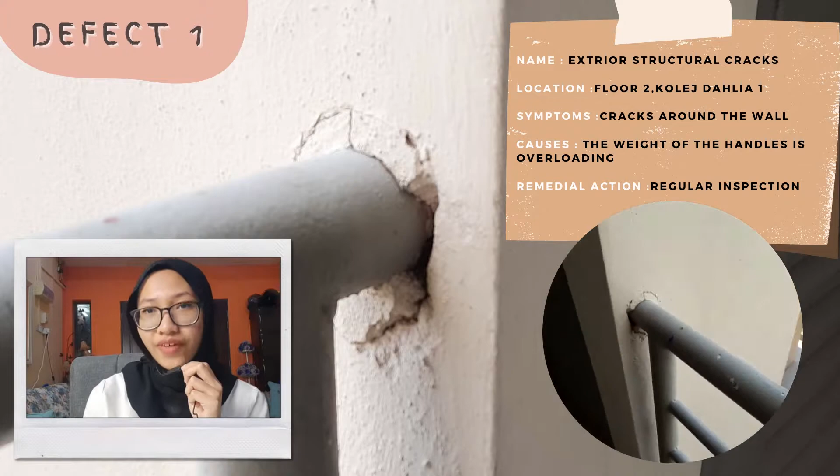Hello madam, now we have arrived at the special presentation for today, which is the building defects. The first defect, as you can see right there, and also in the live video that I have attached, is exterior structural cracks. It is located at floor 2, Kolej Dahlia 1. The symptoms we identified are cracks around the wall that are connected with handles. Why can this happen?

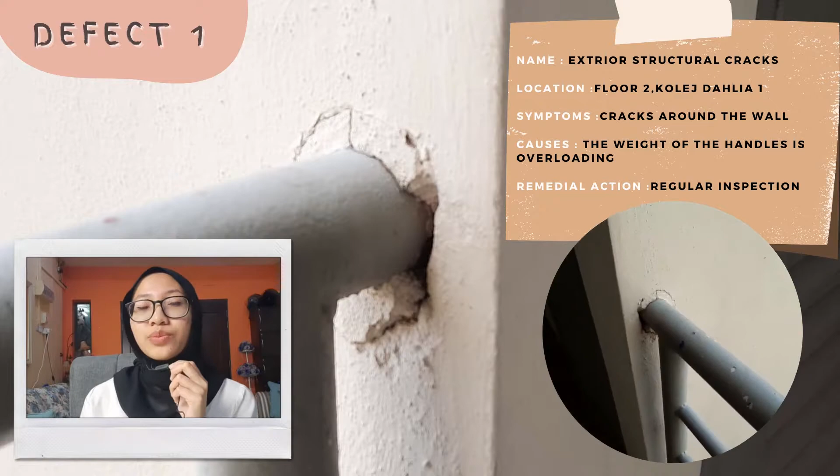The weight of the handles is overloading, which causes cracks around the walls. This may lead to interior cracks, which are cracks inside the wall. So what can we do? Regular inspection is the remedy to prevent exterior structural cracks from happening.

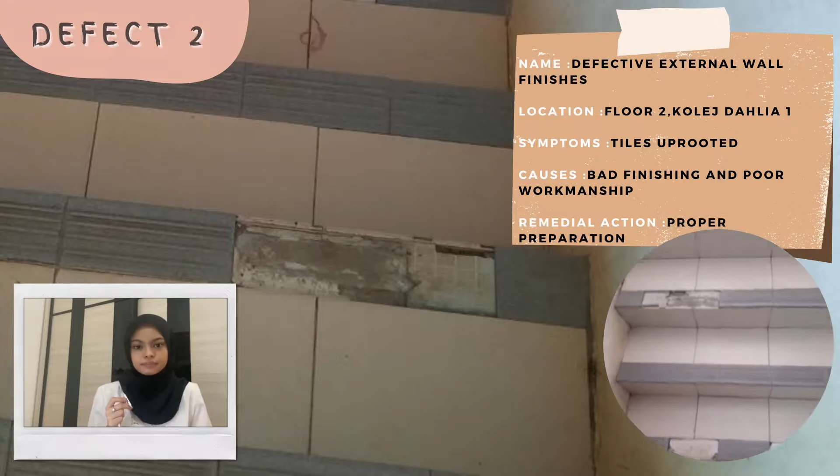This is caused by water going through the beam. The beam became rusty and left that color on the wall. This defect happened because the pipes are not tightened enough with each other, so water flows little by little, leading to rust on the iron beam.

The remedial work for this defect is fabrication and welding processes, which can destroy the gutter coating, requiring local post-manufacturing treatment to restore corrosion resistance.

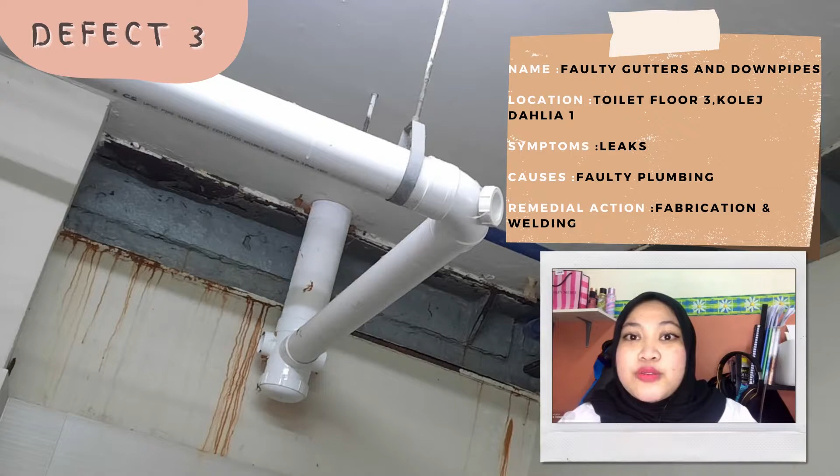So for the fourth defect, there is water leaking in the wall located in Drainage, Kolej Dahlia 1, our case study. The symptom of this water leak is visible mold growth.

Mold is 'lumut' in Bahasa. There is visible mold growth on walls and baseboards. The symptom causing this defect is fungus in the wall due to dampness. The walls were exposed to rain and heat, being in an open public space. This creates fungus and a white appearance on the wall that can damage it.

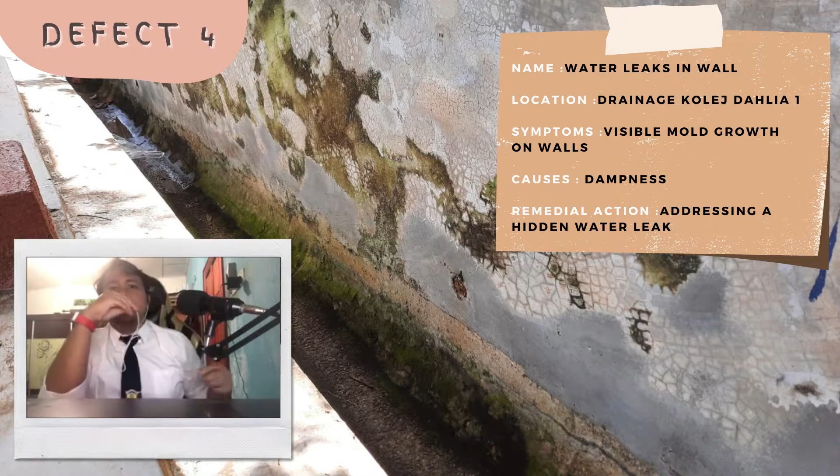So what can we do? What is the remedial action for this defect? Addressing a hidden water leak involves removing the wet drywall or sheetrock, and either drying out the affected materials or replacing them with new ones.

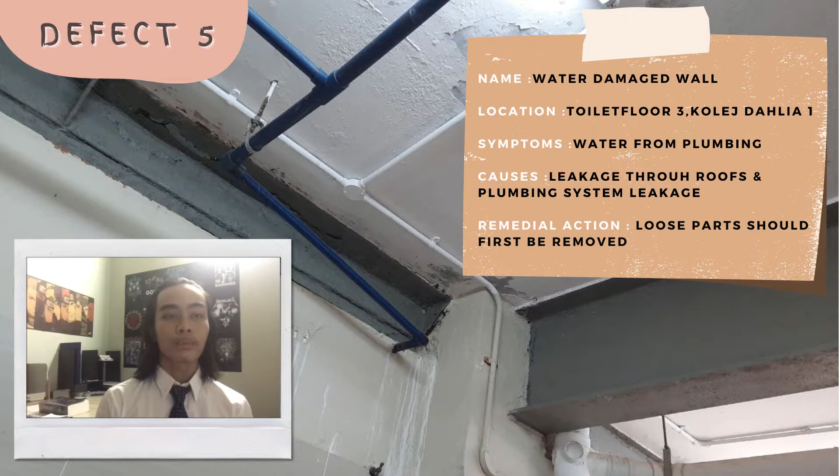As you can see, the paint on the wall has become cracked and worn. This damage can happen due to leakage from the roof and also leakage from the plumbing system in a building. If we just let the damage be and don't repair it, it will lead to further damage. When the roof and wall are wet, the paint will crack.

Besides that, it can also happen if we use a low quality paint product and the building wall surface is not perfect.

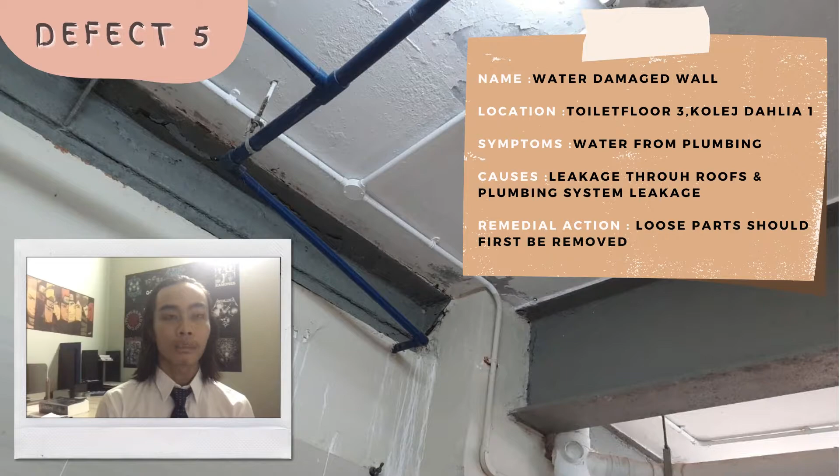To repair the damaged external wall, all the loose parts need to be removed first to eliminate imminent damage or danger, and we can repaint with new colors to protect the new external wall. But make sure the plumbing system or the leakage is repaired first, otherwise the same problem will happen again, because the wall needs to stay dry and cannot be in a humid state.

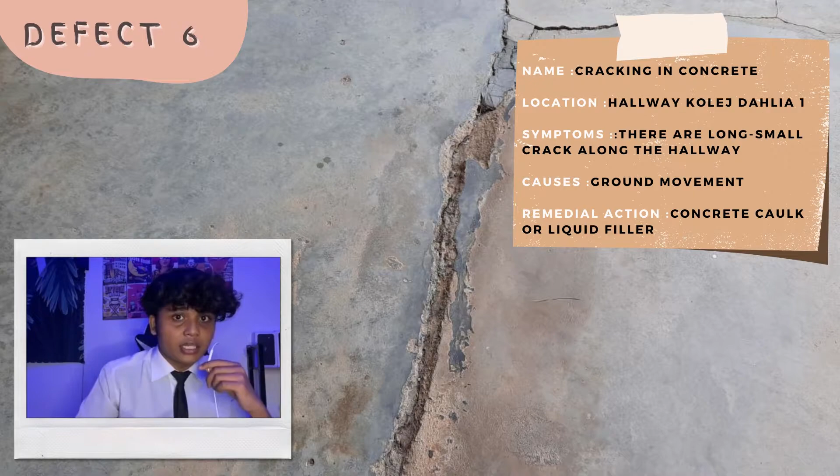So defect number 6 is cracking in concrete. As you can see in the picture, the location is the hallway of College Dahlia 1. The symptom is long small cracks along the hallway. These cracks are caused by ground movement since the location of this college is on uneven ground.

The remedial action is that a concrete caulk or liquid filler can be used to fix cracks with a depth less than a quarter inch wide. Typically, the patching material is combined with water and applied with a trowel.

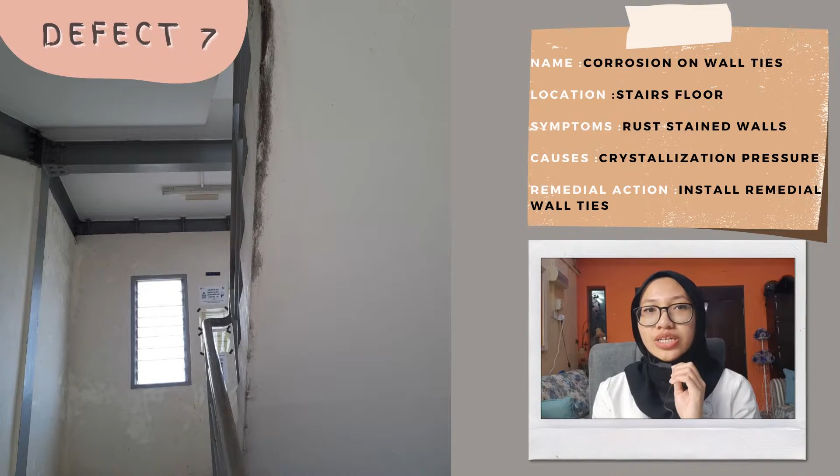Moving on to defect number 7, the name of the defect is corrosion on wall ties, located at the stairs of floor 2 of College Dahlia 1. The symptom we identified is rust-stained walls.

Why does this happen? Crystallization pressure occurs in the pore space of the building materials, along with microorganisms.

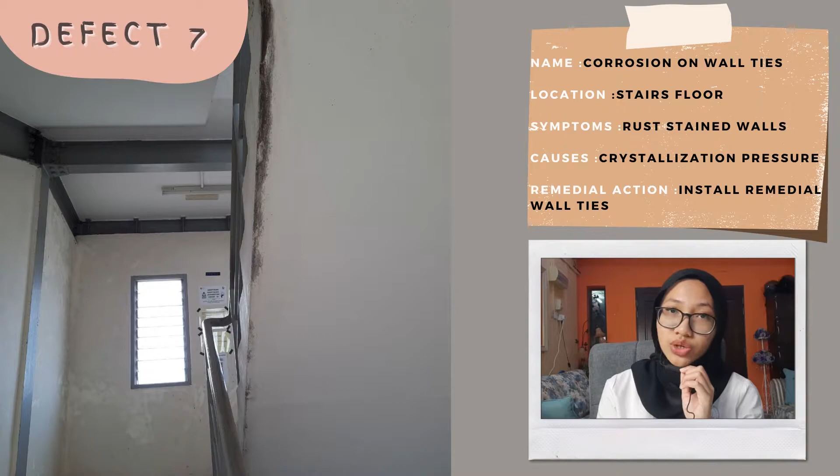So what can we do? The quickest and most cost-effective alternative to wall tie replacement is to install a remedial wall tie, followed by the removal or isolation of the existing wall ties.

Next is dampness in the wall. The symptom we identified is discoloration on the wall - as you can see, the walls are clearly different. This defect happens because of a poor or wrong paint mix during preparation, which causes it to easily crack, leading to discoloration.

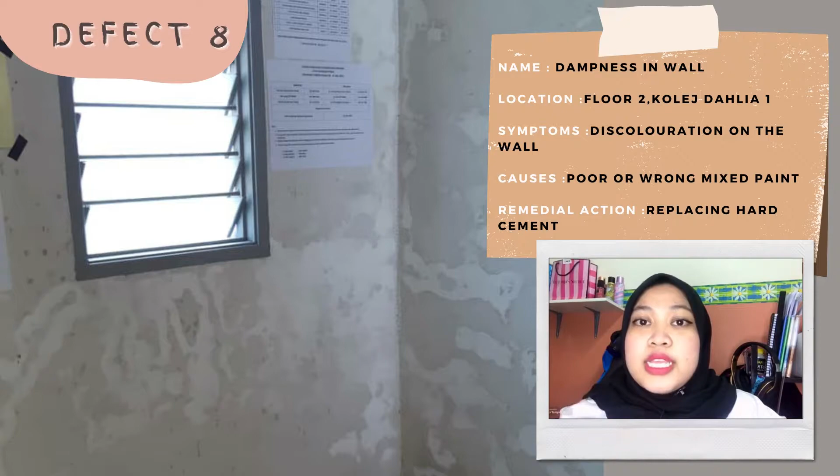The remedial work for this defect is that the maintenance team needs to replace the hard cement render or repoint using a more suitable lime-based mortar, which often helps a damp wall dry out, then paint with good quality paint such as oil-based paint.

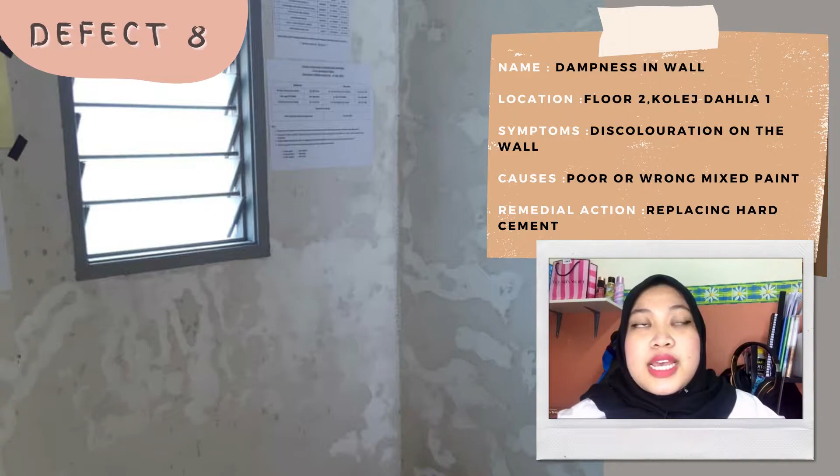Next, the 9th defect is cracked or damaged floor ties. We found this defect on the stairs of floor 1, College Dahlia 1. We can recognize cracked or damaged floor ties just by noticing the cracks at the end of the stairs.

These cracks can be caused by settlement that was not well resolved, and perhaps from the cement material used being of poor quality. This defect can be cured by addressing the localized movement. Fractures can be cut out and filled once the movement has stopped. In any case, the guidelines for bond failures should be followed.

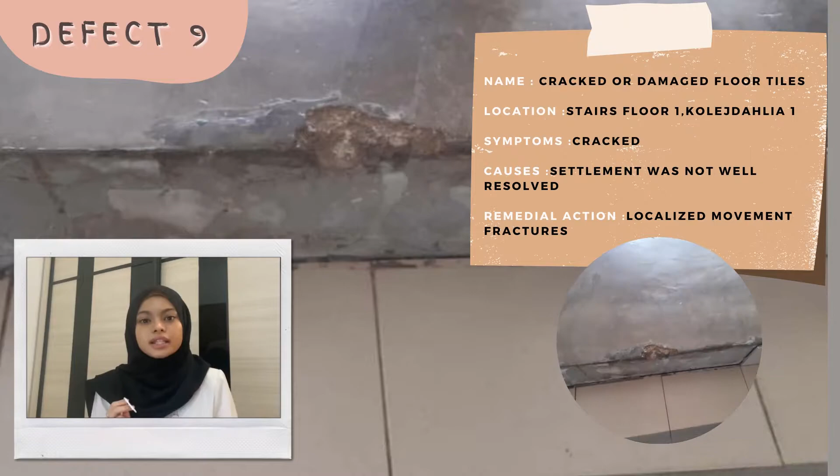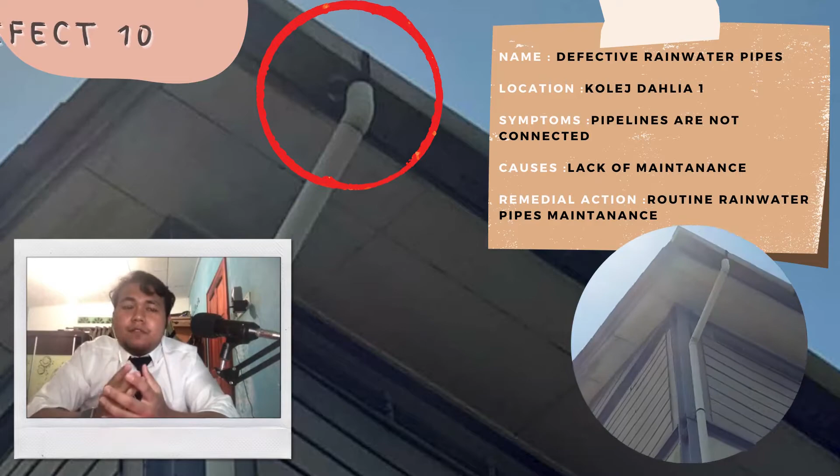For the next defect, defect number 10 in our assignment, is defective rainwater pipes located in Kolej Dahlia 1. The symptom is the pipelines are not connected to each pipeline on the roof properly, and the pipeline does not attach properly after a while. The cause is these defects are caused by lack of maintenance. Maintenance plays an important role to make sure the pipes are always connected together properly.

What is the remedial action we can take to overcome this problem? We can do routine rainwater pipe maintenance, which must be done monthly or regularly by professionals for remedial waterproofing, because this is a safety issue, especially to students living there.

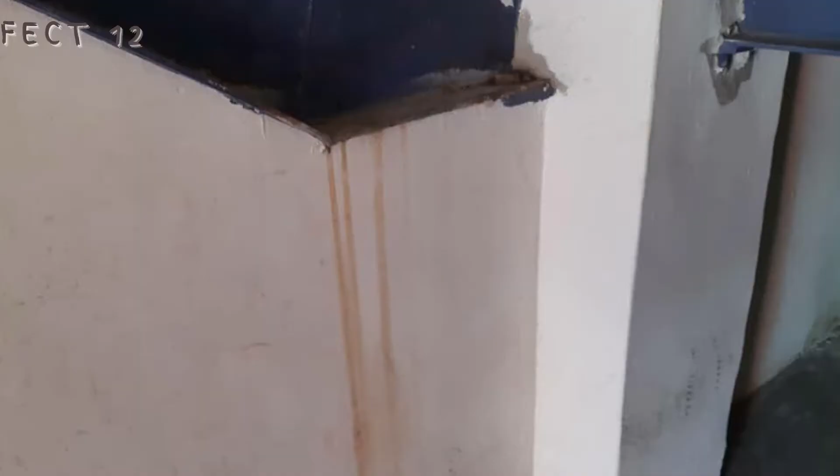Defect 12 is corrosion in the wall. The symptom we can see is the gold-brown color on the wall, which we usually call corrosion. This happens because the concrete steel bond material is not good.

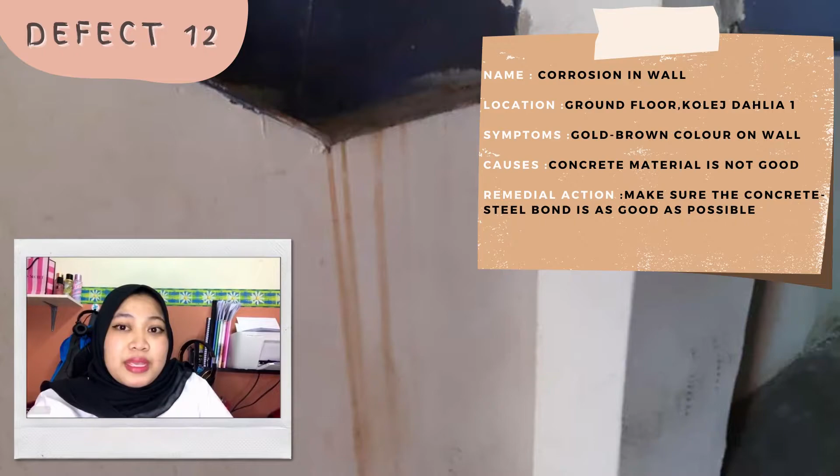Remedy work for this defect is to make sure the concrete-steel bond is as good as possible. This is because concrete alone is not capable of resisting the tensile forces it is often subjected to. Otherwise, concrete may crack and allow harmful substances to attack the steel bars.

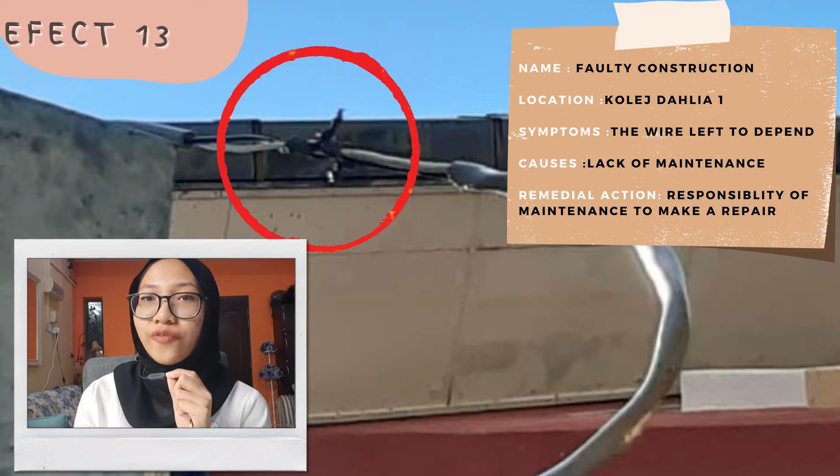Defect number 13, as you can see, is faulty construction located at Kolej Dahlia 1. The symptom identified is the wire left hanging. Why does this happen? It is because of lack of maintenance from the maintenance team itself.

So what can we do? The responsible maintenance team needs to identify the area and make repairs by installing a wire cover attached to the wall.

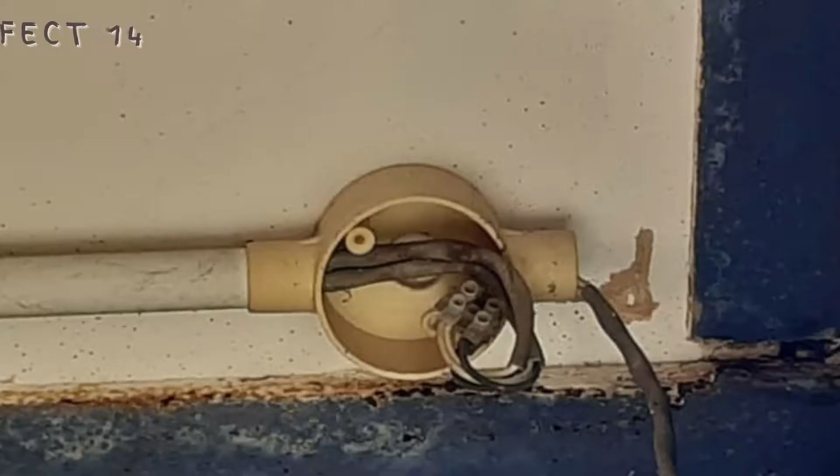The 14th defect is also a faulty construction defect, located on the ground floor of Kolej Dahlia 1. We can identify it by its symptoms: the wire is tangled and the cover of the lid is gone. The cause is the lid is not suitable with the cover and it falls down; in other words, it happens due to lack of maintenance.

The remedial work for this defect is the responsible maintenance team needs to identify the area and make repairs by installing a wire cover attached to the wall.

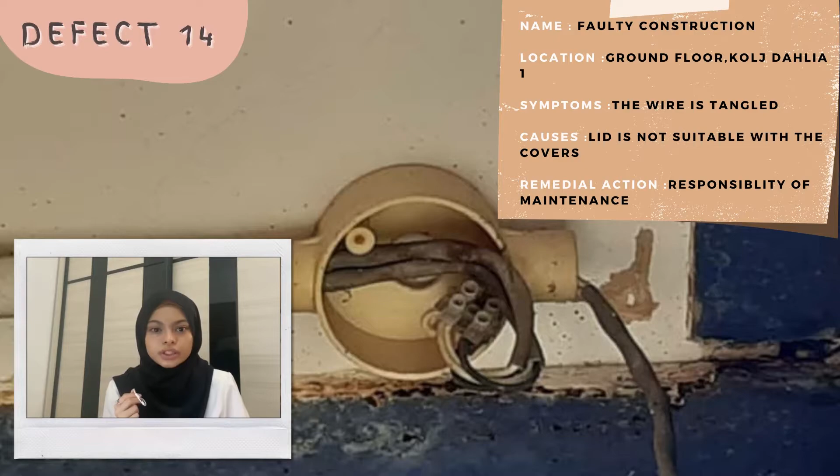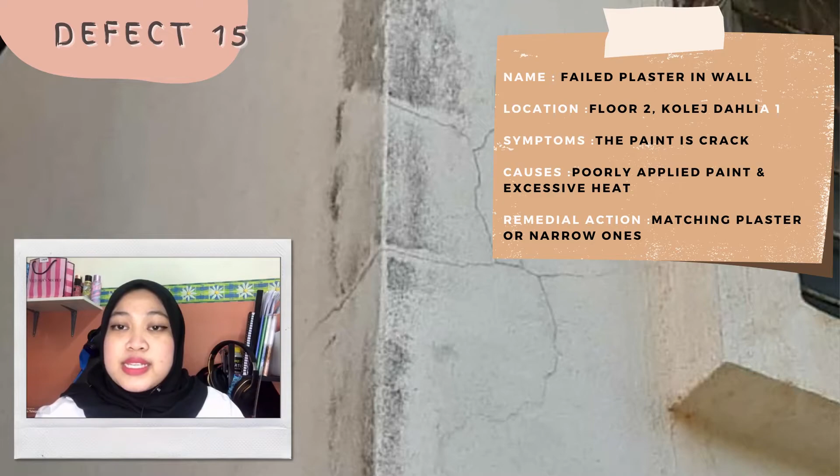Defect number 15 is about failed plaster in the wall. The symptom is easy to recognize: cracks in the paint until you can see the cement of the wall. This happens because of paint poorly applied and the wall being exposed to excessive heat. The remedial work is that cracks and pop marks may be filled using matching plaster or narrow ones with proprietary interior filler gauged with whiting.

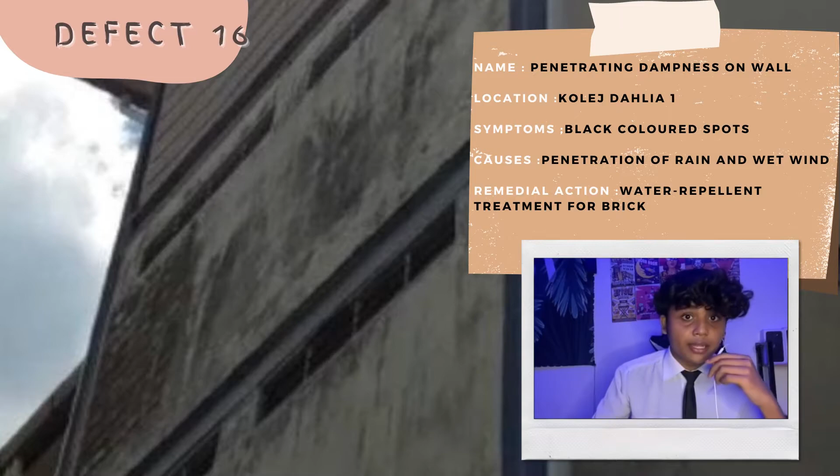Defect number 16 is penetrating dampness in the wall, located at Kolej Dahlia 1. The symptom is the wall has full black color spots, as you can see in the picture. This defect is usually caused by penetration of rain and wet winds. Other than that, it may cause leakage through the roof, as we can see the roof is not long enough to cover the wall.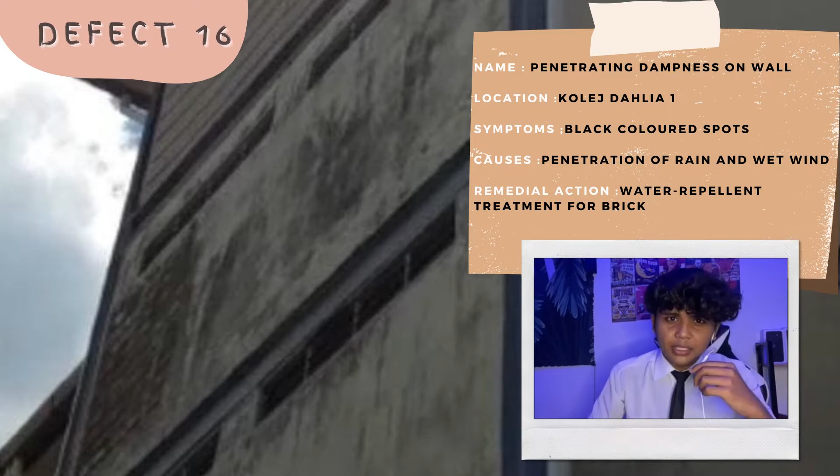To stop dampness affecting masonry, bricks can be treated with a water repellent treatment for bricks, stone masonry, and concrete.

The cause for this defect is because the plaster set too quickly and also poor or wrongly mixed plaster during preparation. The remedial work is the application of an undercoat or a spatterdash coat before plastering, which can avoid greening.

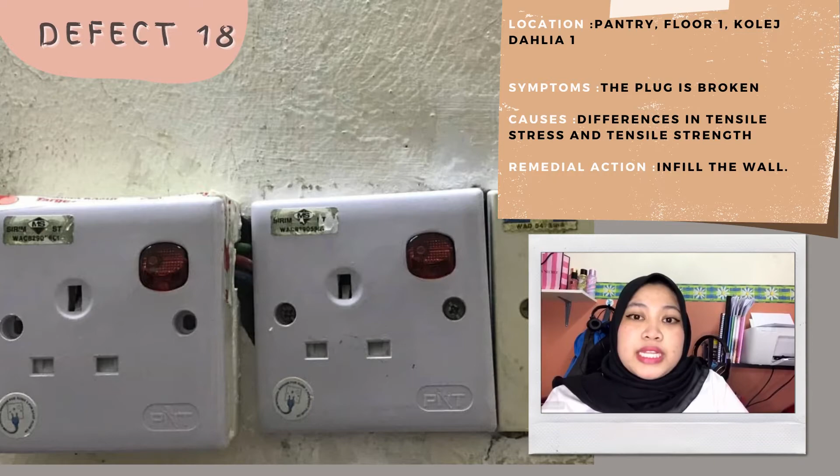Failing in wall. As you can see in the picture attached, the symptom of this defect is a broken plug that did not attach to the wall. This can happen due to differences in tensile stress and tensile strength applied to concrete, which will influence concrete durability. The remedial work for this defect is that the maintenance team needs to infill back the wall.

Defect number 19: the name of the defect is paintbrush marks on wall, located beside the stairs at floor 1 of Kolej Dahlia 1. The symptom we identified is paint brush lining marks, as well as uneven paint on the wall.

Why does this happen? These defects are usually caused by workers poorly applying the paint. It may also be caused by low quality paint. What can we do? We can sand the wall with sandpaper and then wipe it with a cloth to get rid of dust. Last but not least, repaint the area while maintaining a wet edge.

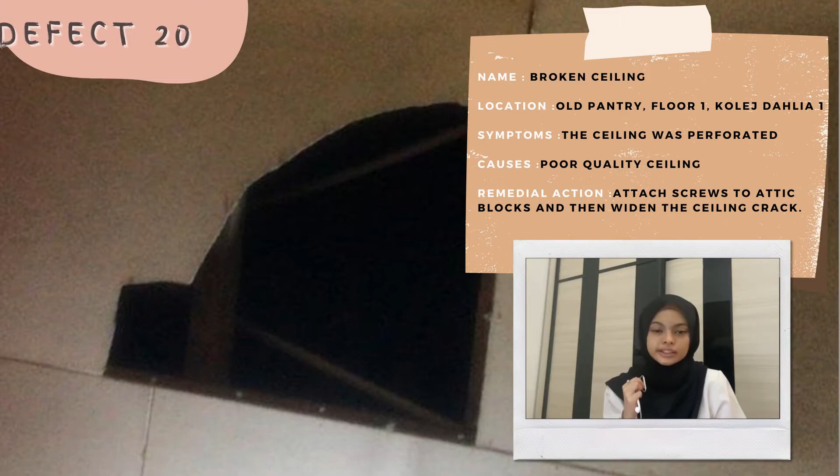Next, the 20th defect. As we can clearly see, this is a broken ceiling located at Old Pantry, floor 1, Kolej Dahlia 1. The symptom for this defect is that the ceiling is perforated. This defect may be caused by poor quality ceiling, because the ceiling is too thin and cannot handle the weight of the joint.

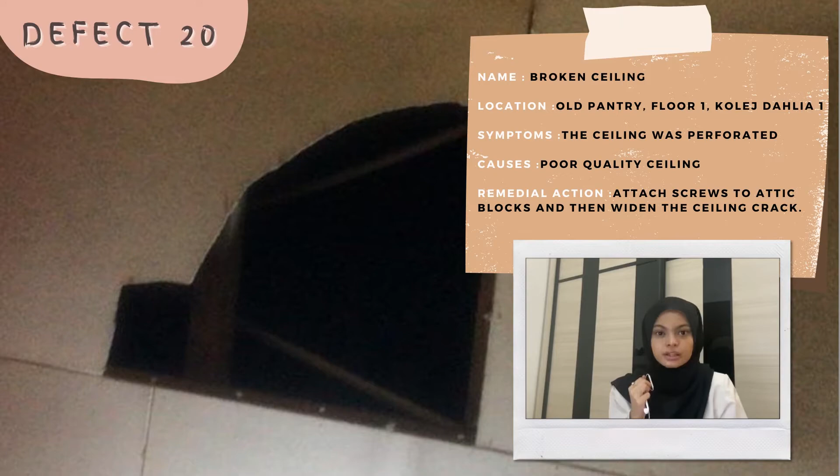The remedial work for this defect is firstly you have to apply drywall tape and mud. However, this broken ceiling needs a professional to repair the defect, and after repairing it should be maintenance free for many years. Defect 21 is faulty construction, which is the lamp not functioning at night. This is because a bulb had blown or there is a technical problem with the circuit. To solve this, regular maintenance and inspection are required to make sure occupants are not bothered by this faulty construction.

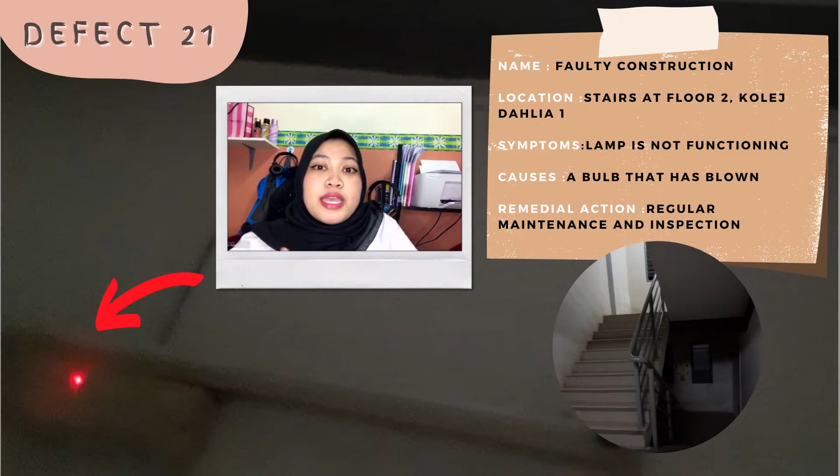For the next defect, defect number 22 is plumbing system leakage, located under the sink in the second floor's toilet in Kolej Dahlia 1. What is the symptom of the defect? The leakage leaves a brown colored mark with eroded marks around the connection of the pipe. The cause is this happens because the connection is not tightened enough and leads to leakage.

When it leads to leakage, it can become a problem because the toilet may be flooded by water coming from the unconnected pipe. What can we do? What is the remedial action? We can regularly conduct building and other maintenance checks. This means maintenance always plays an important role because the pipe or other defects must be maintained regularly.

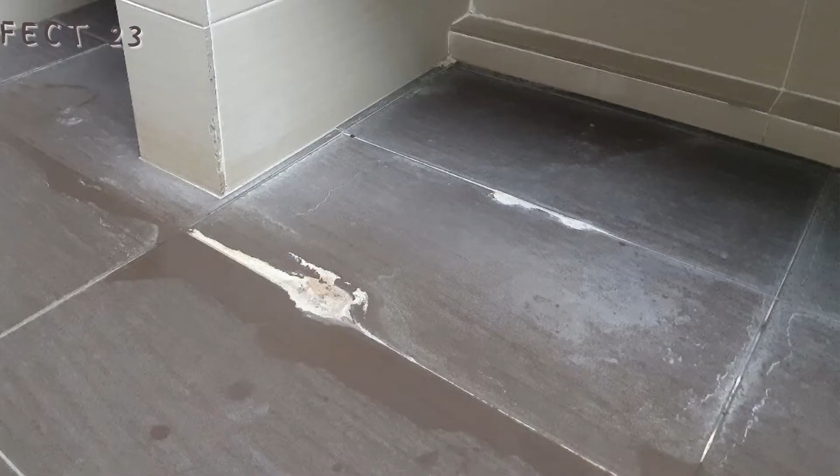Next, the 23rd defect is chemical damage and wear on floors. This defect was found under the sink of the toilet on floor 2, Kolej Dahlia 1. This defect often happens, and the symptom is white colored or slippery marks on the tiles of the floor. These defects happen because the chemicals being used are not suitable and are of poor quality, so they create white stains on the floor.

However, we can repair this defect by doing regular maintenance such as scrubbing the floor and putting on sealers and coatings.

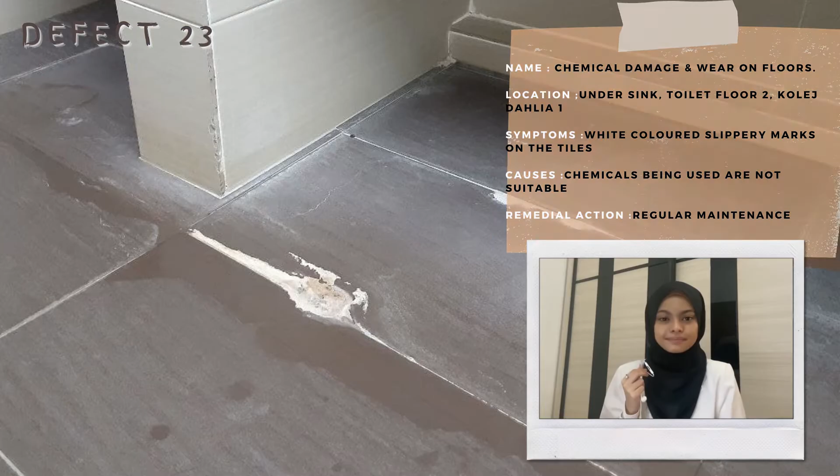Defect number 24 is leaking on shower head, located at shower number 4, toilet floor 2, Kolej Dahlia 1. The symptom is water coming out from the shower head and leaking. This defect usually happens because the material used is poor and cheap. The remedial action is to clean the shower head and retouch it or replace it with a new shower head.

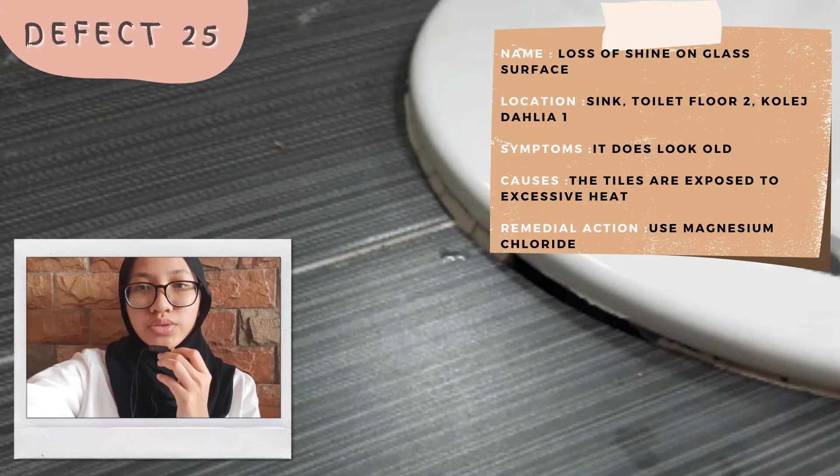Why can this happen? This is because the tiles have been exposed to excessive heat. Otherwise, it may be due to unsuitable solvents being added, which is why there is no shine. So what can we do? We need to use magnesium chloride.

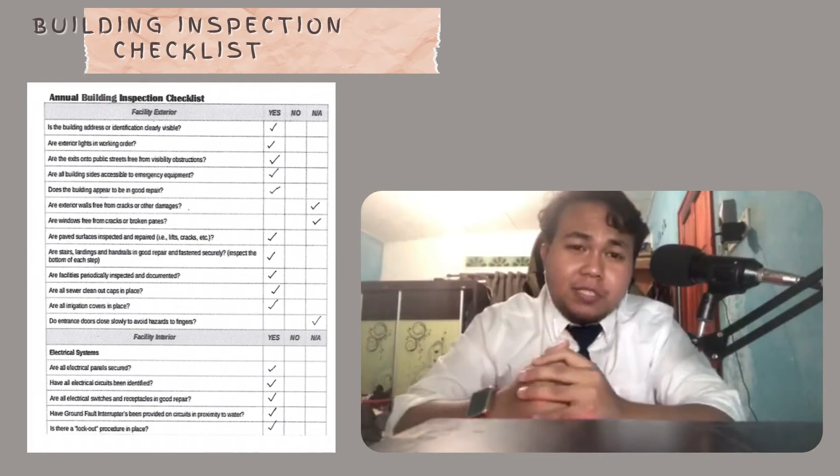For the appendix, as you can see in Figure 1, we have our building inspection checklist that we use to inspect our site for defects. So the question is, what are the purposes of a building inspection checklist? Why is it so important?

The main purposes of an inspection checklist are to outline quality products and standards that are required, and to provide objective criteria for inspecting products or facilities, to be exact, to ensure they meet customers' expectations and regulatory standards.

Why is it so important? Because the purpose of building inspection is to verify compliance with the minimum safety standards set forth in the adopted codes. During the inspection, the building inspector, which is us, will review all work done, compare it to the approved plans or building code as applicable for compliance, and issue an inspection report.

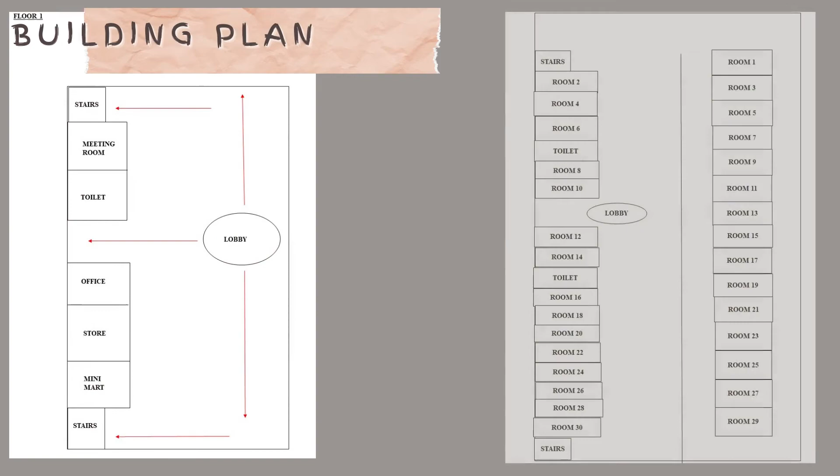So in the end of the report, thanks to our group members who gave the best cooperation to succeed in this report, we are able to identify the building defects that have occurred in the building, which is Blok Dahlia 1, Kolej Cempaka Sari UiTM Seri Iskandar Perak. We are also able to identify the remedial work needed in order to maintain the building and avoid the defects from happening again.

We can conclude that there are a lot of factors that can contribute to damage and defects in a building, such as naturally, intentionally, or caused by a poor quality of building structure. This matter has caused discomfort for the occupants of the building, such as the toilet condition and air conditioning consistently breaking down, and can even cause incidents if the building structure is damaged.

So to prevent these matters from happening, a building needs to be maintained periodically in order to keep its condition and level of performance good. Indirectly, the building can be used in the long term and it can reduce the cost to repair it if the